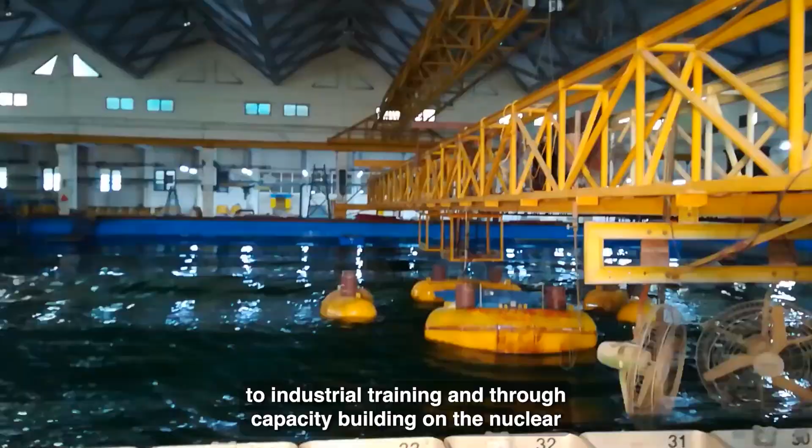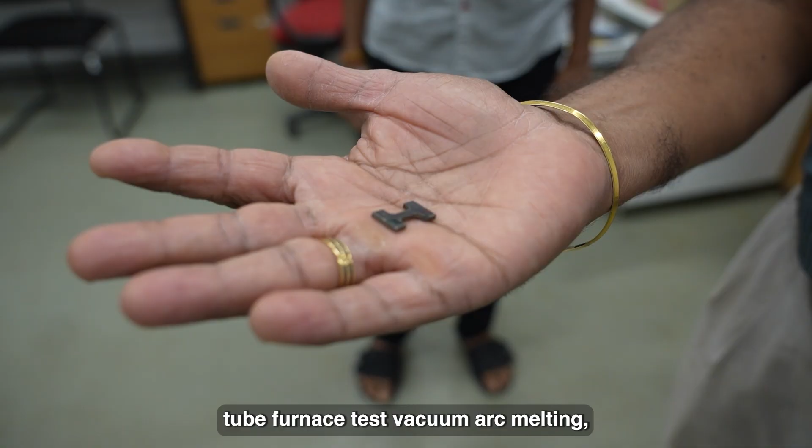This is part of a material science engineering laboratory which serves as a teaching aid for the maritime engineering program. When talking about materials innovation in the maritime industry, concrete and steel have been conventional candidates of choice for engineers, but we also have titanium vessels and high-speed craft boats made of fiberglass. These advanced materials do not always come under conventional standard design codes of practice. We conduct box furnace tests, tube furnace tests, vacuum arc melting, induction melting, vacuum induction melting, and vacuum sealing, all present in this laboratory, which is just a small segment of the material science laboratory.

This is a typical furnace where the operating temperature for testing specimens can go very high. Generally at room temperature and ambient conditions, the mechanical properties will not alter much, but as you'll see in the course lectures, the strength of the material degrades when temperature rises beyond 600 degrees. So when designing for fire resistance, you must choose an alloying element such that the strength doesn't degrade beyond 600 degrees Celsius.

Welcome to the ambience of IIT Madras lecture theatre. This is one of the interesting classrooms where maritime engineering classes will be conducted. We have state-of-the-art projection facilities and good audio-visual recording systems.

Once the lecture is over, the system can generate PDF files of the lecture directly, and these can be emailed directly to your email ID. It's a state-of-the-art facility at IIT Madras where lectures are recorded for lifetime and shared with students immediately. This is the IIT Madras library.

The library has all collections of books referred to as standard textbooks and references for the course and program. It also has a lot of online editions of design codes of practice, reference materials, and e-collections of various video lectures of international courses and programs related to maritime engineering.

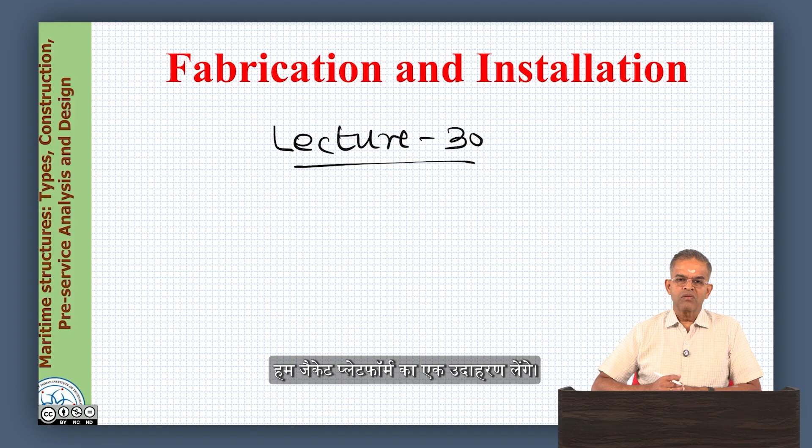We will take an example of a jacket platform, specifically a steel jacket platform. We already know jacket structures are bottom-founded structures used for oil and gas exploration, and they are a subset of maritime structures.

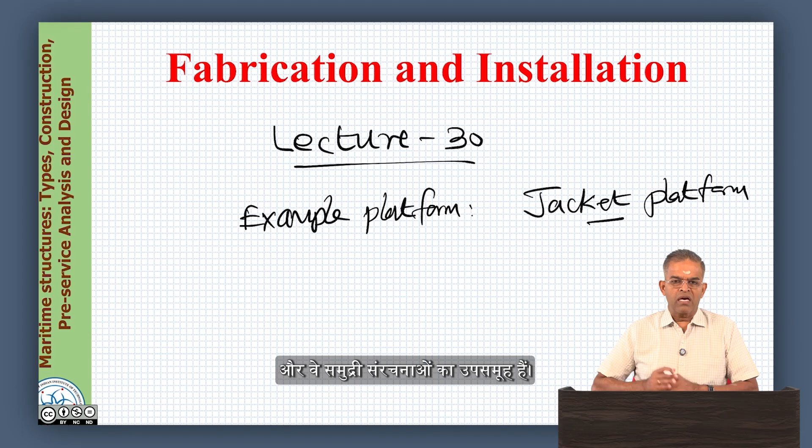Bottom supported platforms, as learned from previous lectures, are permanent, rigid type structures, fixed to the seabed using piles, or sometimes resting on their own colossal weight. An example would be gravity based structures which rest on their colossal weight. We also know that these kinds of structures become uneconomical as they move towards deep water installations, because the substructure cost increases phenomenally as you go into deep waters. However, bottom supported platforms are quite successful operating in shallow and moderate water depths, up to approximately 300 meters.

In previous lectures, you must have learnt how to classify water depth. It is not a simple number; it varies based on various hydrodynamic characteristics used to classify depth as shallow, intermediate, medium, deep, and ultra-deep waters. We have learned them, and I believe you will refresh that knowledge again.

In the previous lectures on structural action offered by these kinds of platforms, we learnt that bottom supported structures essentially resist the load by their strength. So, the geometry, the member sizing and thickness, the weight and the dimensions of the platform play a very important role in resisting the exciting force acting on the platform, because these platforms essentially resist the lateral loads caused by waves, wind, current and impact loads by their strength.

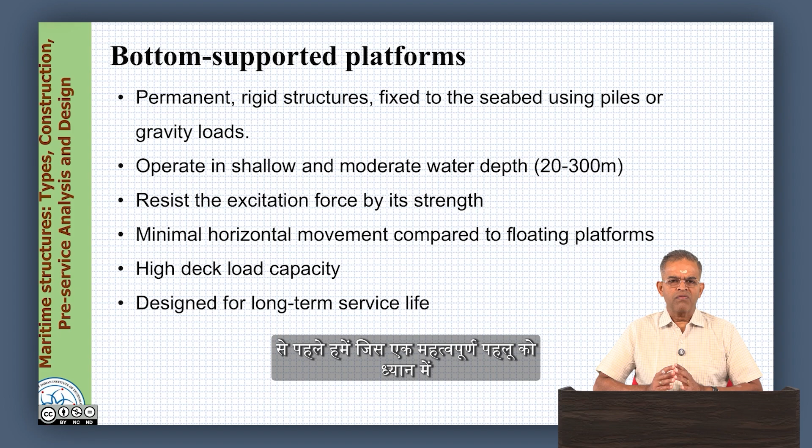One important aspect which we must consider before we think about fabrication and installation of bottom supported structures is that they are going to be heavy, they are very massive, and they are of larger size. They are required because they are designed to have large deck capacity and designed for long term service life. Approximately the service life of these platforms is said to be 25 to 30 years. Because of this duration of staying in marine waters, they are designed to be very strong, as well as founded in soil by pile foundations.

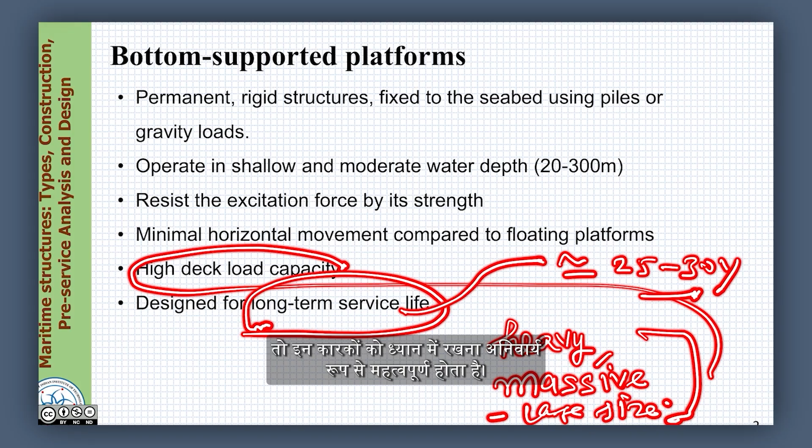So why are we talking about structural action, load and size? Because when we talk about installation and fabrication, these factors are essentially important to keep in mind. Let us quickly see some photographs of these platforms to recollect our memory from the previous lectures.

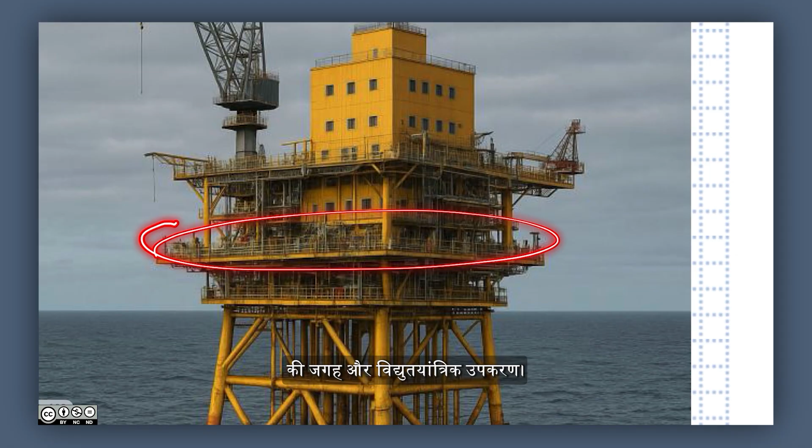Let us look at this, let us look at the top side again. The top side again has the living quarters, the crane and the drilling derrick, then the system for crane operation, then boat landing and electromechanical equipment. Look at the substructure - the substructure part is essentially steel, and it is a jacket platform. We call this assembly jackets, because they look like a template structure.

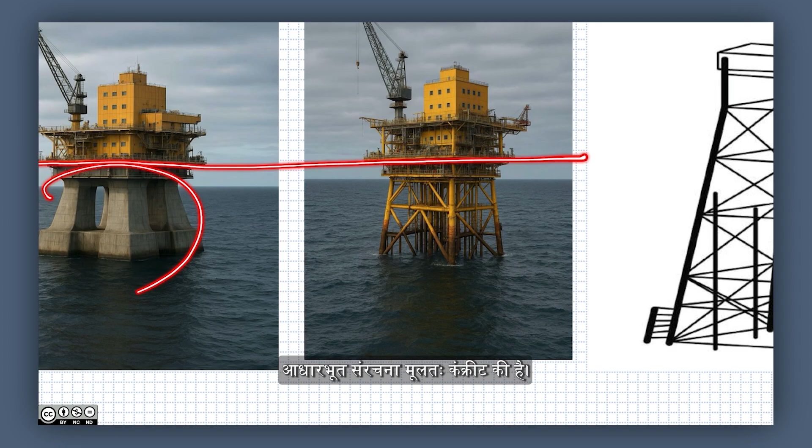Now I want to look at both these figures in parallel. Look at the substructure part of both figures - here the substructure is essentially concrete, here it is steel. This is a gravity based structure and it has got a very huge colossal weight, whereas this is not as massive as the GBS structure.

The most important feature which you will now notice and which is necessary to understand is that these structures are wave transparent. What do you mean by wave transparent? We allow the waves to pass through. When we allow the waves to pass through without any obstruction, the forces exerted by the waves on these members are minimal. But here you can say they form a massive obstruction, therefore they encounter waves in a larger amount.

Now one can also notice that the top structure remains more or less similar in both cases, and the top side structure has got different modules - the living quarter module, the upper deck module, the middle deck module, the landing module and the crane and jackets. These are all different modules which are pre-assembled and brought to site and then assembled here. So we do not bring the whole unit as one go - we do the substructure separately, the superstructure separately. Even in the superstructure, we can bring these pieces separately depending upon size and the convenience of handling as far as crane capacity is concerned.

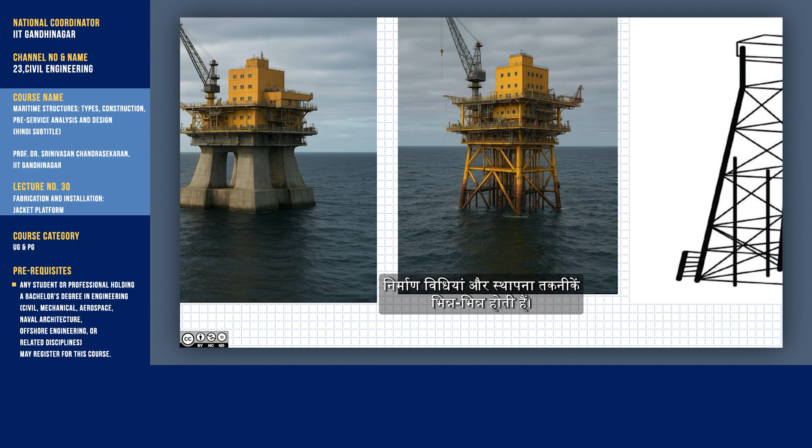As far as this is concerned, you need a big barge where they are placed and the barge is kept afloat to the site. So the fabrication methods and installation techniques vary with the different kinds of offshore platforms.

This has got to be understood because all of them do not have the same or similar substructure. Furthermore, when the substructure is of steel or concrete, when they are designed to be wave transparent or not, then the equipment and tools used for fabrication and installation are again going to be different. So we can say the installation methods vary with types of platforms.

That is a very interesting observation which you can also make from the figure. Let us clearly look at an overall view of a jacket structure. We know this is a heli deck on the upper side, and these are the main legs of the jacket. One can see the main legs are vertical, then inclined. There is a taper, about 1 in 15 - a gentle slope. So vertical, then tapered.

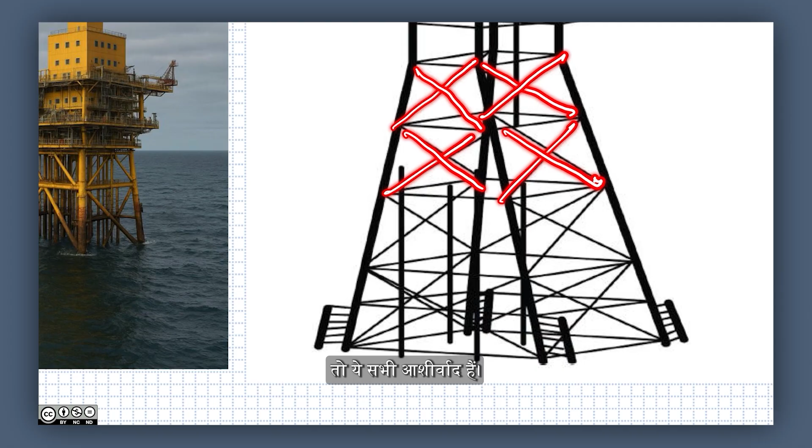So these are all the main column elements. You will also see the subsidiary secondary elements, and you will also notice these are the bracings - the shape being X, they are called X bracing. You can also have different types of bracing, which we will see in detail in coming lectures. So these are all the bracings, these are main legs, these are secondary elements.

So these elements and the fabrication has got to be done with higher quality control in the fabrication yard, because I cannot do the checking of welding, the non-destructive evaluation, after I install this in sea. For example, the water level is somewhere here, this is the water depth, and these are all going to get into the piles. So I cannot check any of these connections once they are installed and commissioned. So the entire quality control needs to be checked in the fabrication yard.

It means, very simply friends, this has got to be fabricated in the yard in modules and transported and commissioned.

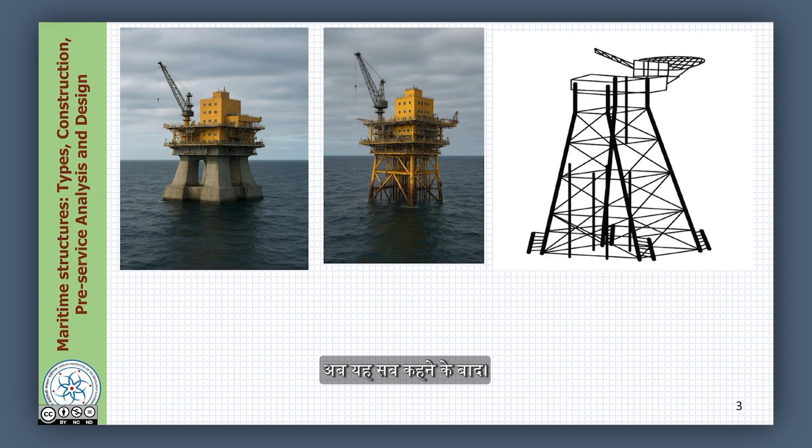Having said this, let us look at the steps involved in fabricating a jacket platform. Fabrication of a jacket platform has got some important points to remember. The foremost point, which is very important for a jacket, is material procurement. Jacket platforms are essentially fabricated using something called marine steel. We have already seen different classifications of steel in previous lectures of this course.

So you would have got an idea of what kind of steel is used for maritime construction at this moment. We are now specifically choosing marine steel as the material for the jacket, and we need to prepare the jacket using marine steel fabrication. So we do the assembly of components one by one, then we do the jacket legs and bracing assembly together. Once they are all arranged, we start welding them.

Once the welding is completed, then we install the pile sleeves and boat landings. We will talk about what is a pile sleeve a little bit later. Then for cathodic protection, or protecting these steel structures from extensive corrosion in marine environment, we also do something called anode fitting, which is useful for corrosion protection.

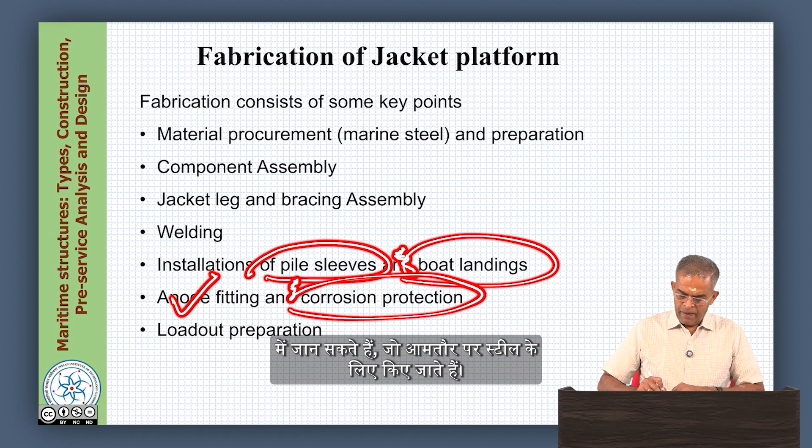Once this is all completed, we need to take it to the site, because all this is happening in the yard now, and I want to take it to the offshore site. So I do what is called load out preparation.

Okay, let us again revisit these points. Choose the material carefully. While choosing the material, you must do enough quality checks. You must visit the fabricating yard frequently. You must test the mechanical properties of the steel being used for fabrication intermittently, and you should be sure that whatever design parameters you have chosen for the design should be implemented in true spirit as far as the material properties are concerned. So a very good quality control on material procurement is necessary.

Furthermore, friends, fabrication is a continuous process. Similarly, installation is also continuous, you cannot stop this process once it starts, unless it is demanded by either a localized accident or because of some weather conditions. So therefore, friends, apart from procuring the material, you must also have enough quality control and indent for the materials.

So I could now say the important aspects for material could be: quantity of the material should be sufficiently available, and you have to check that in the beginning. You should also do the quality check in the yard for the material property. You should also provide enough indents for procurement of material in advance, so that the work is continuous and is not stopped.

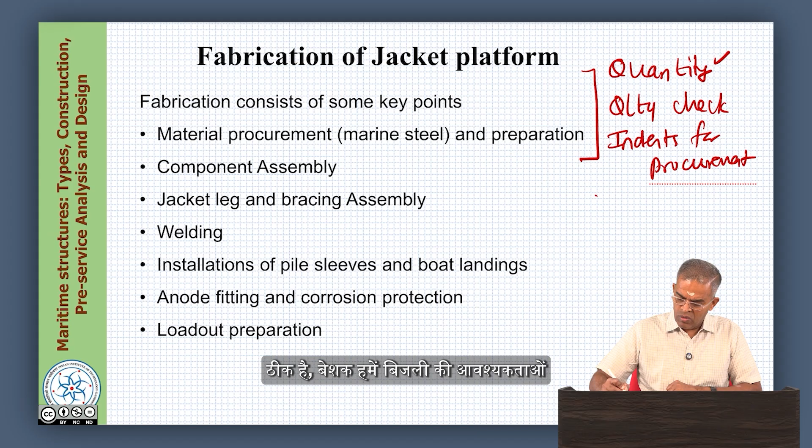Okay, of course we need to also look at the power requirements and safety requirements. I mean, without saying why they are not important, we all realize these are necessary, because our connections are essentially welded connections. We need high power to do this. Material procurement has got a lot of subsets to be controlled.

Once I have the material procured, first I will start doing the components. I will assemble the components. We have already seen what are the different components in a jacket structure or a template structure. We take the components, then we pick up the main legs of the jacket and the bracing assembly. We keep on joining them and so on. We do welding. We look into some pictures of how welding can be done and how welding can be checked.

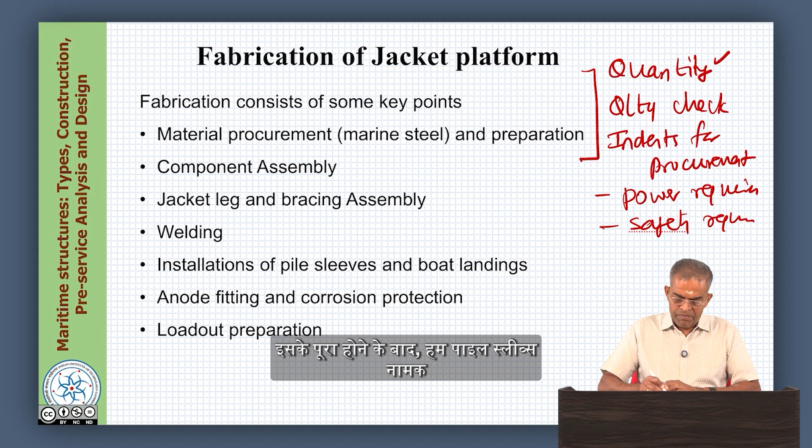So you do the arrangement for boat landing, then you also do some ancillary fittings like anode fittings, corrosion protection methods, and then once these are all done in the yard, keep them ready for something called load out. The word itself is very clear: load the assembly and take it out of the yard to the site. So this is called load out preparation.

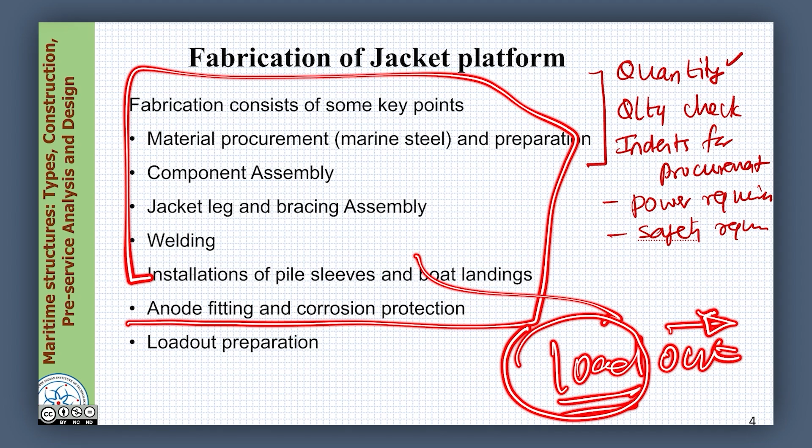Okay, having said this, let us slightly talk more about the material procurement and preparation. The common cross-sectional shapes used for jacket platforms are tubular steel tubes. We also use plates for the deck, and there are some special components like pile sleeves, conductor guides, and ancillary corrosion protection materials which are used.

Let us now see what is a conductor sleeve. Then let us talk about this. Let us talk about what is a conductor guide. Friends, conductor guides are specialized components used in offshore drilling.

Why are they required? They are required to accurately position and install the well conductors. Well conductors are a component of the offshore drilling assembly. Furthermore, these guides are very necessary when you use large diameter pipes.

When you need to drive these pipes into the seabed to improve the well stability, we use conductor guides. Okay, so what is the installation process of conductor guide?

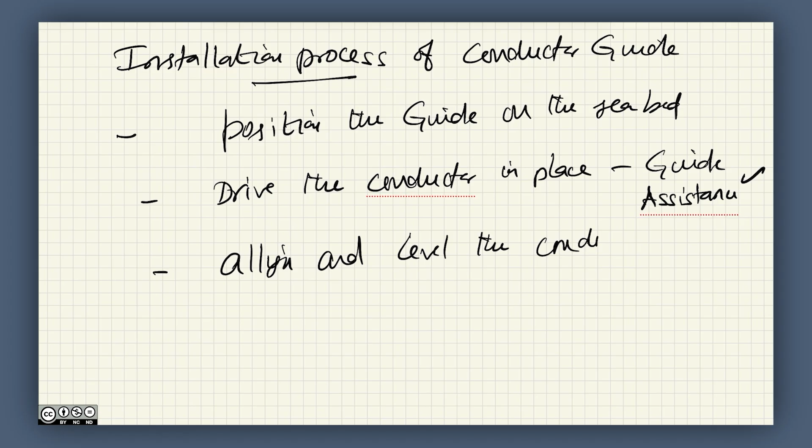First, position the guide in the seabed. Second, drive the conductor in place. Third, use the guide assistance. Then align and level the conductor. Then secure it properly, that is, fix it properly, and verify or check its integrity.

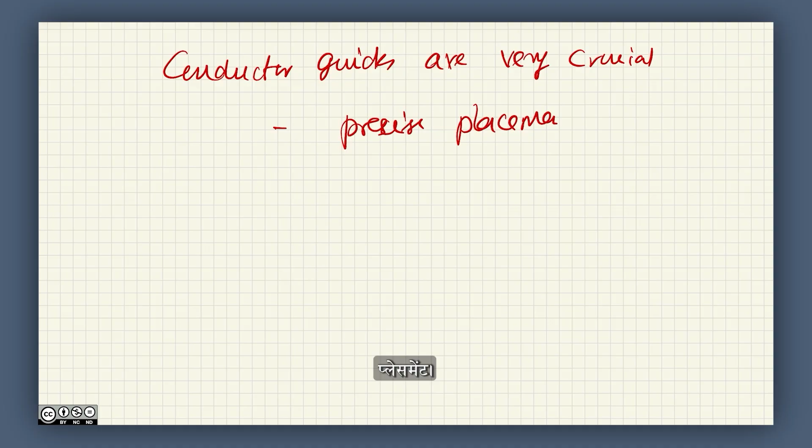Now, friends, conductor guides are very crucial to ensure precise placement of the conductor. And why do you need this? It is important to ensure wellbore stability, which is necessary for offshore drilling operations.

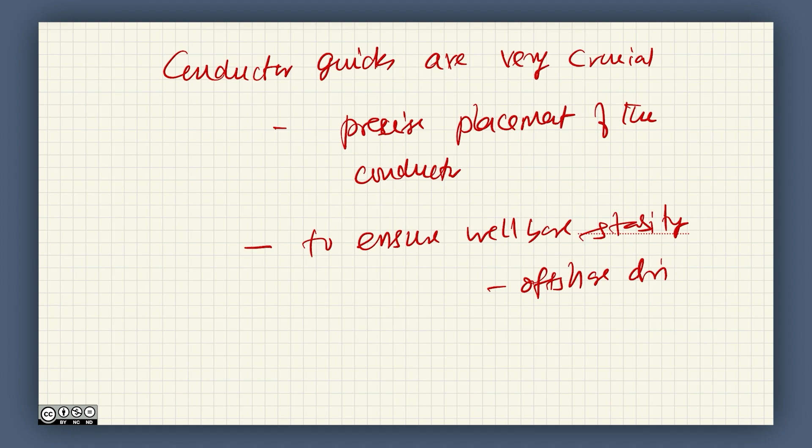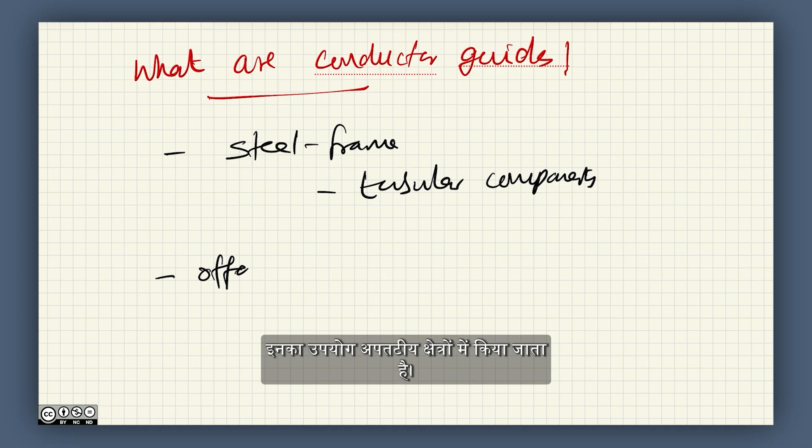Then the question comes, what are conductor guides? Conductor guides are steel frames. They can also be tubular components. They are used in offshore oil and gas production systems to position the drilling rig, to align the rig, and to provide lateral support to the well conductors.

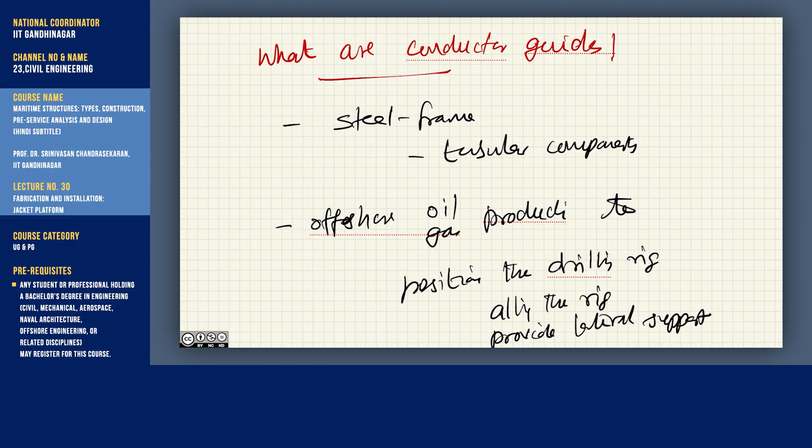So whenever you have large pipes to be driven in the seabed, you need conductor guides. That is a general story we can write: for drilling large pipes into the seabed, we require conductor guides.

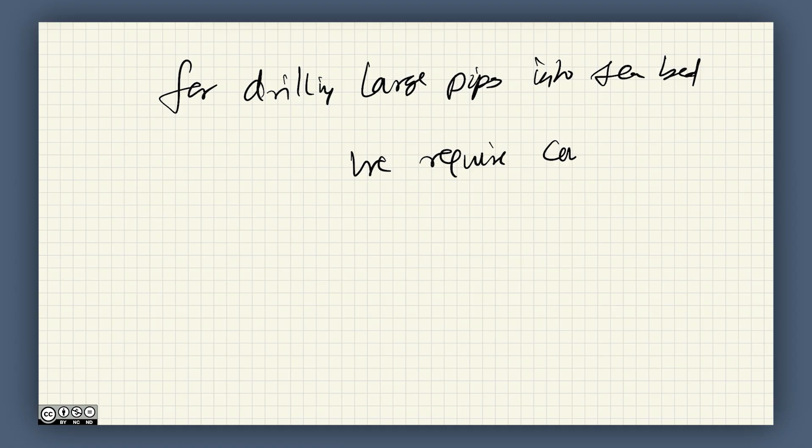Now, conductor guides, where are they installed? They are installed at various elevations in the jacket. They also help to withstand lateral forces from waves and wind.

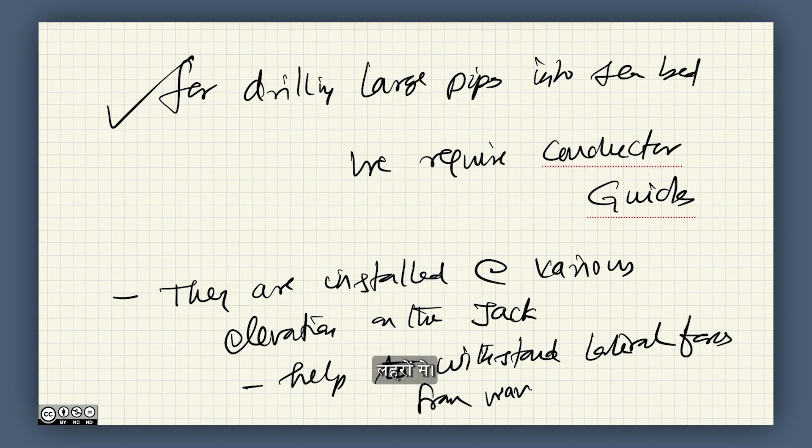Let us see what are the functions of this. What is the primary function of a conductor guide? Precise positioning of the conductor. And why is it required? If you want to ensure wellbore stability during drilling, you require this.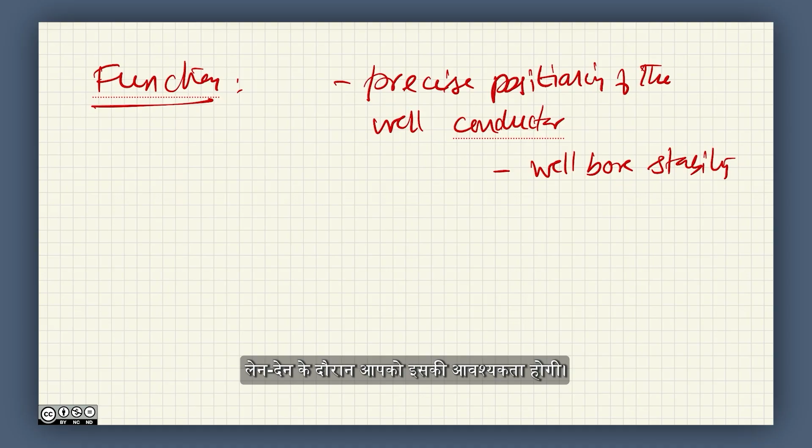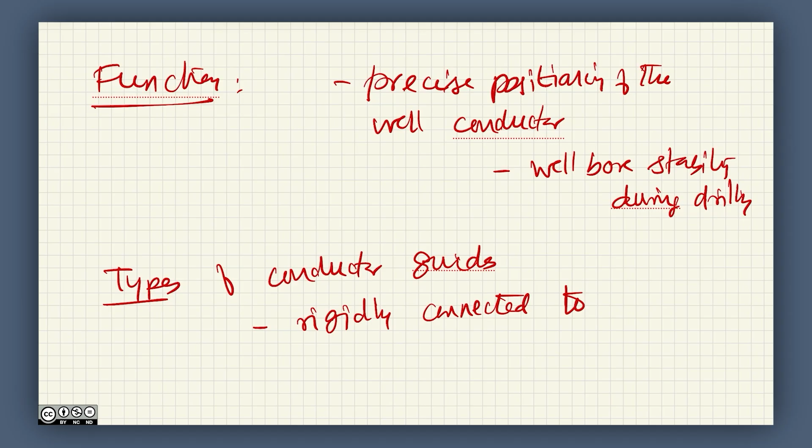There are different types of conductor guides. One, they can be rigidly connected to the jacket framework. Another way, they can also be adjustable with legs using bolts.

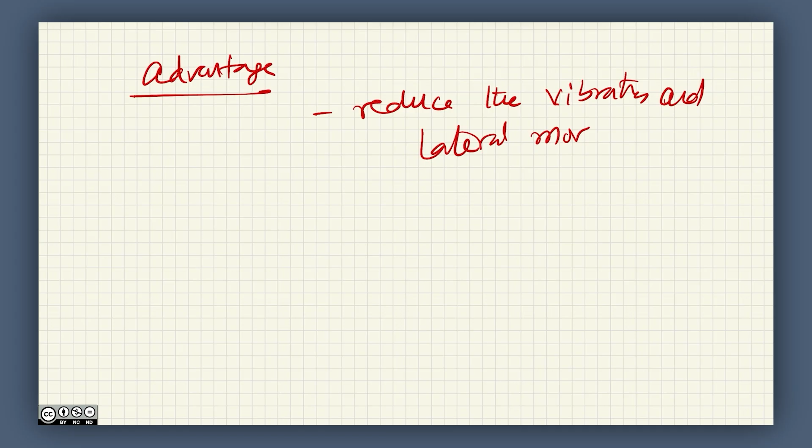What advantage do you gain by using a conductor guide? It helps to reduce the vibration and lateral movement of the leg. And it also helps reduce the fatigue damage, I mean it improves fatigue life.

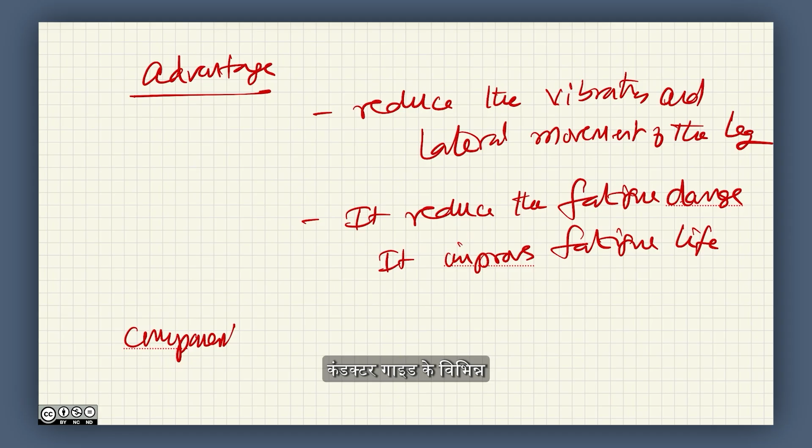What are the various components of your conductor guide? Various components are the guide frame, sometimes polyurethane, centralizers, and guide can.

So conductor guides are useful for precisely achieving the drivability of large diameter piles into the seabed, and they are helpful in improving the wellbore stability and integrity of the subsea well systems.

So we said that conductor guides need to be assembled, and then you also start procuring material for ancillary and corrosion protection materials. Once you procure them, verify the grades. Steel is graded as grade 1, 2 and 3 as we saw in API RP 2A in the previous lectures. So verify the material grade, conduct tests on them at the site, in the fabrication yard, and quality checks need to be done according to API RP 2A, ASTM and ISO standards.

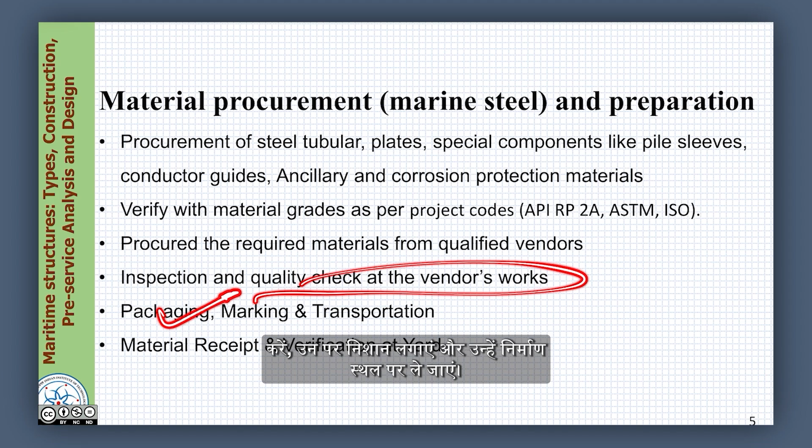Once you are verified with this, procure them in enough quantity from qualified vendors. Inspect and do quality check at the vendor's works before it is transported to the fabrication yard. Then after the quality check is completed, pack them, mark them and transport them to the fabrication yard. Now maintain a proper receipt and verification at the yard. So these are all the steps involved in material procurement before fabrication, what we prepare for fabrication in the fabrication yard.

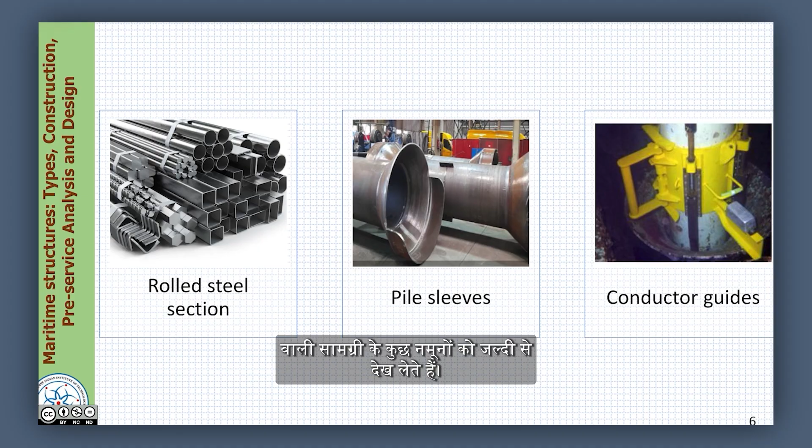Once this is done, let us quickly see some samples of material procured for one such jacket platform construction. You can see different kinds of rolled steel sections being used: square with uniform thickness with sleeves, circular with mounted caps at the tip, where the tip is slightly larger than the diameter, what we call mounted caps. You can also have studs, which are solid steel pieces of hexagon shape, and rods which are used to connect the sleeves together.

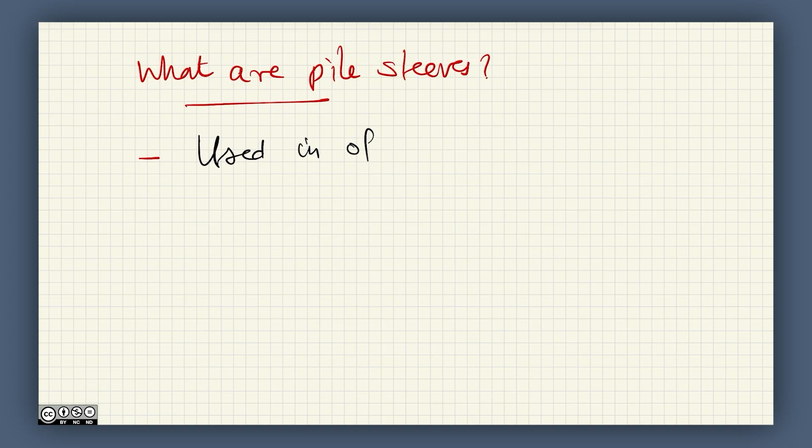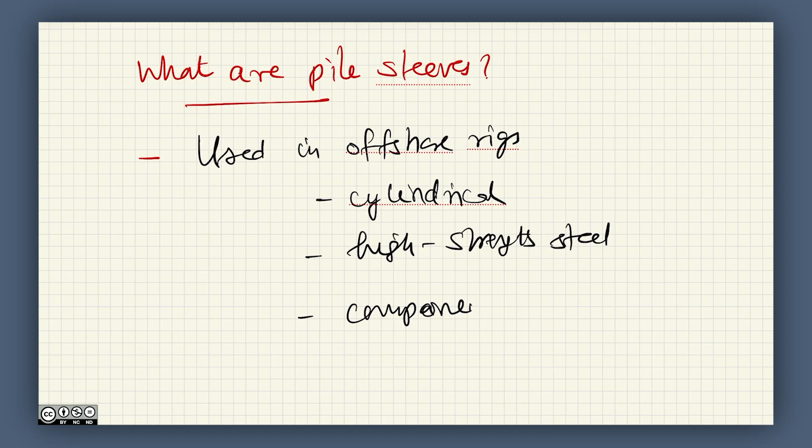Then the question comes, what are pile sleeves? The pile sleeves are used generally in offshore rigs. They are cylindrical, made of high strength steel. They are components attached to the bracket, to the main legs of the jacket. They are helpful in guiding, supporting and securing the steel piles while they are driven into the seabed. The pile sleeves typically look like this - these are pile sleeves, and they help you guide the piles while they are driven into the seabed.

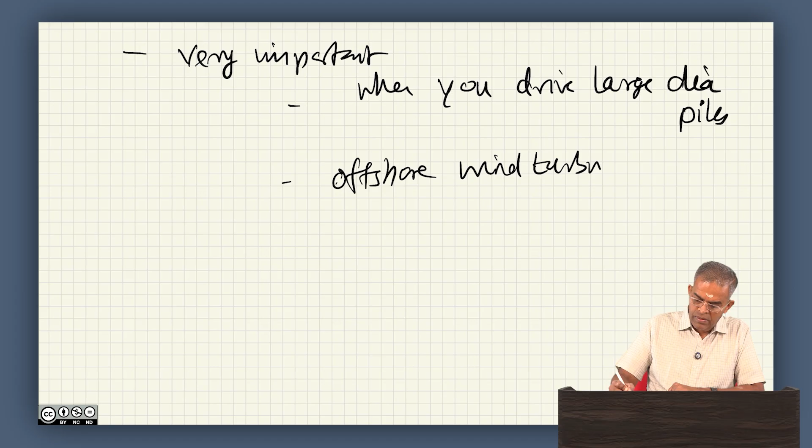They are very important. Essentially, when you drive large diameter piles, they are very helpful in the case of offshore wind turbine installation. They are helpful in withstanding lateral loads caused by waves and wind.

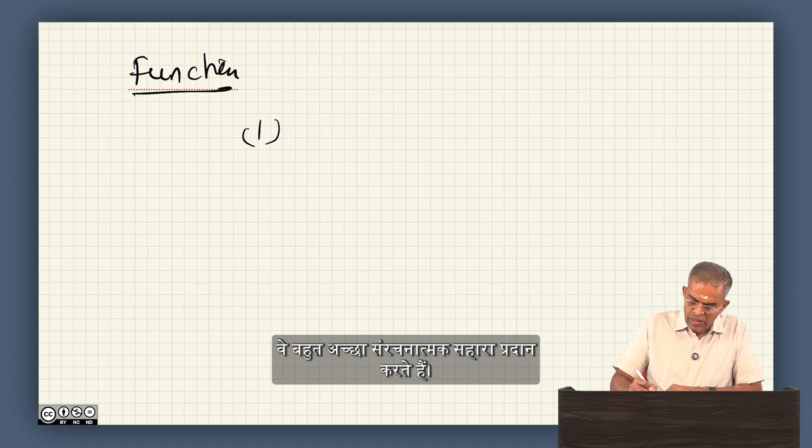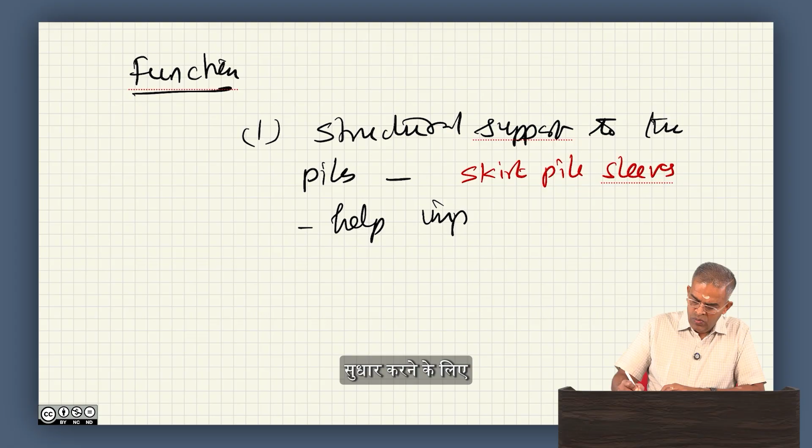Let us see a few important functions of pile sleeves. They offer very good structural support to the piles. They are sometimes referred to as skirt pile sleeves also. They help to improve stability of piles when driven into the seabed.

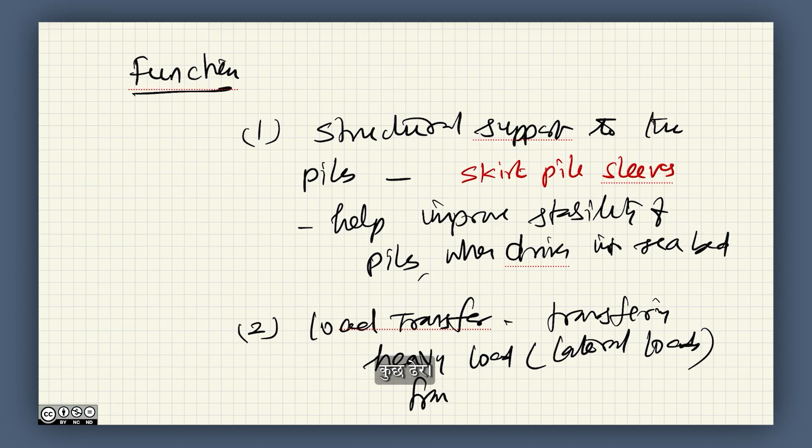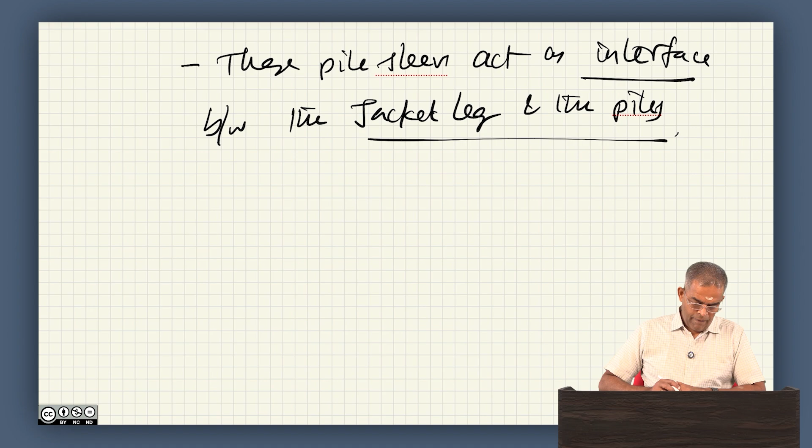The second function is a very good load transfer path. They help in transferring heavy loads, essentially lateral loads, from the piles to the soil. Furthermore, these pile sleeves act as an interface between the jacket legs and the pile, so they are very helpful during grouting.

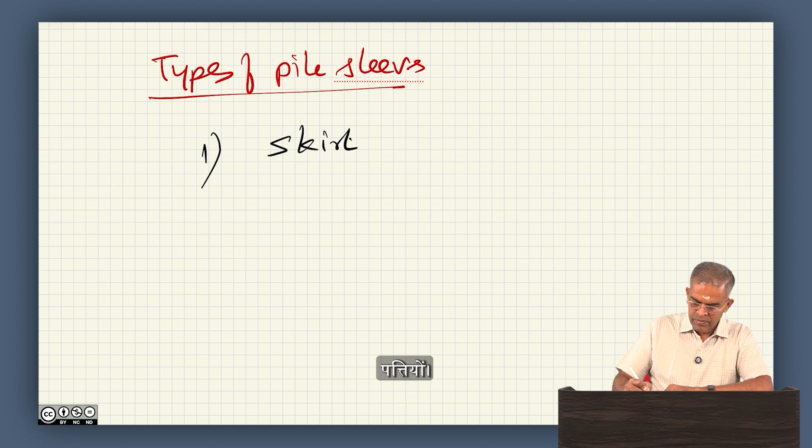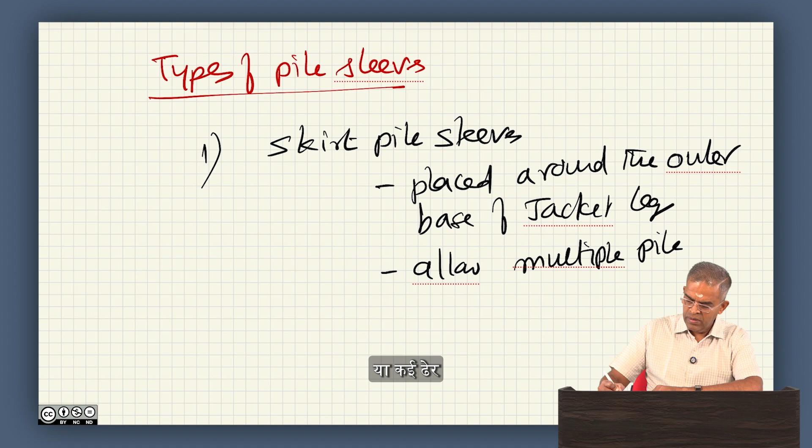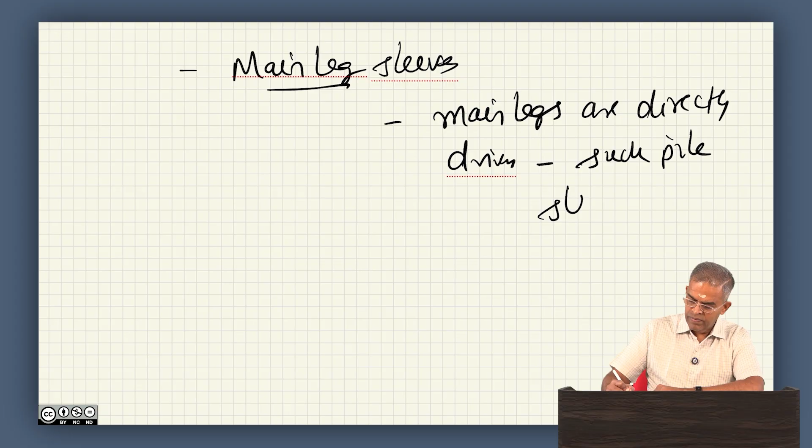There are different types of pile sleeves. One, skirt pile sleeves - these are placed around the outer base of the jacket legs, and therefore they allow multiple legs or multiple piles to be driven in a cluster. The other type is the main leg sleeves - in many cases, main legs are directly driven, and in those cases such pile sleeve types are useful. How do you install a pile sleeve?

So there are 3 steps involved. Step number 1, stabbing and driving. Step number 2, grouting. Step number 3, underwater operations.

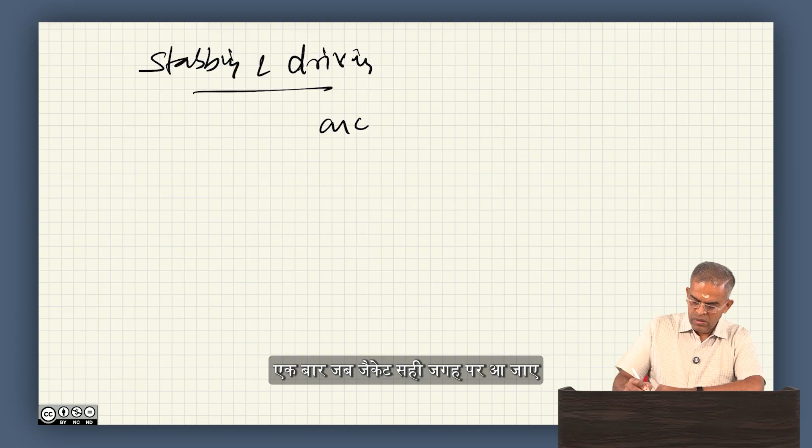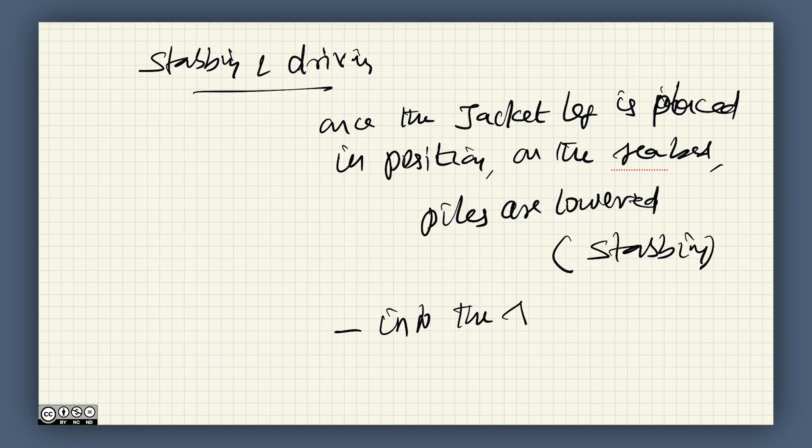Let us see one by one quickly. In stabbing and driving, once the jacket is in position, or jacket leg is placed in position on the seabed, then piles are lowered. This process is called stabbing. They are lowered into the sleeves, then driven to required depth using hammers, hydraulic hammers. That is called stabbing and driving.

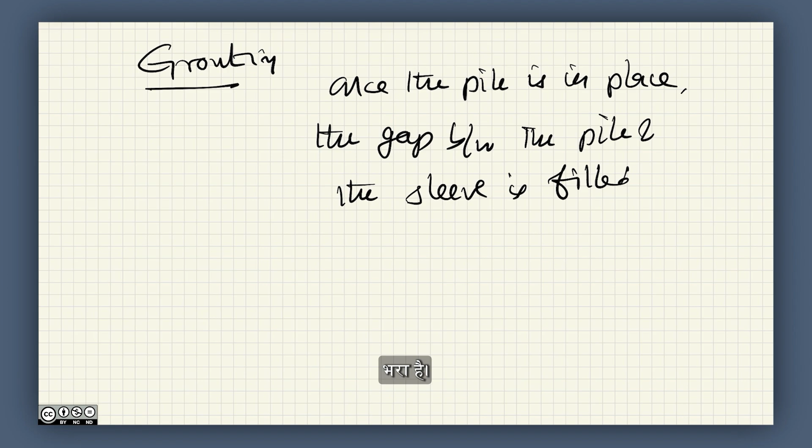The next step is grouting. Once the pile is in place, the gap between the pile and the sleeve is filled. This is an annular space which is grouted, and this will help to create a permanent connection.

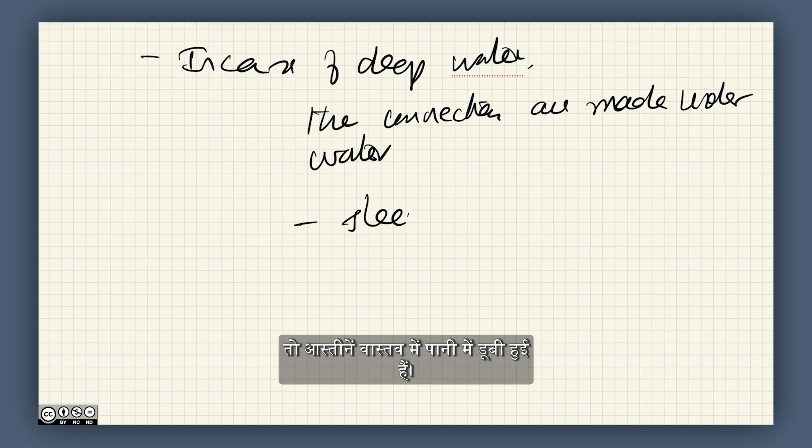The third step, in case of deep waters, the connections are made underwater. So the sleeves actually are submerged at about 20 to 30 meters in water.

Let us see what are the components of a pile sleeve, key components. There are key components like shear key, packers, and guide cones.

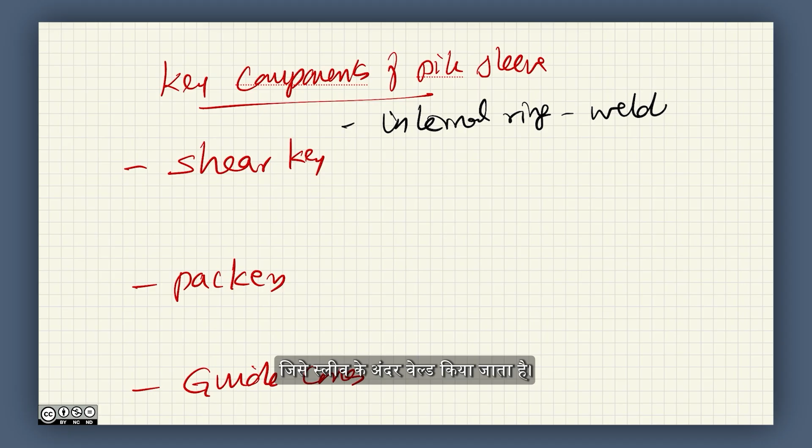Let us see what is the shear key. Shear key is an internal ring which is welded inside the sleeve, and of course outside the pile. What is the purpose? It helps increase the strength of the grouted connection. That is why it is called shear key.

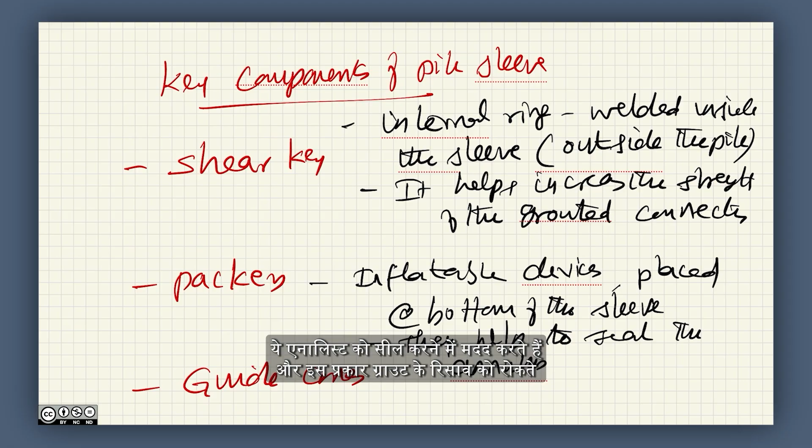Packers are inflatable devices which are placed at the bottom of the sleeve. They help to seal the annulus. Annulus is the gap between the pile and the sleeve. They help you to seal the annulus, and therefore it prevents grout from leaking.

Guide cones are added to the top of the sleeve, and they help in assisting the pile driving.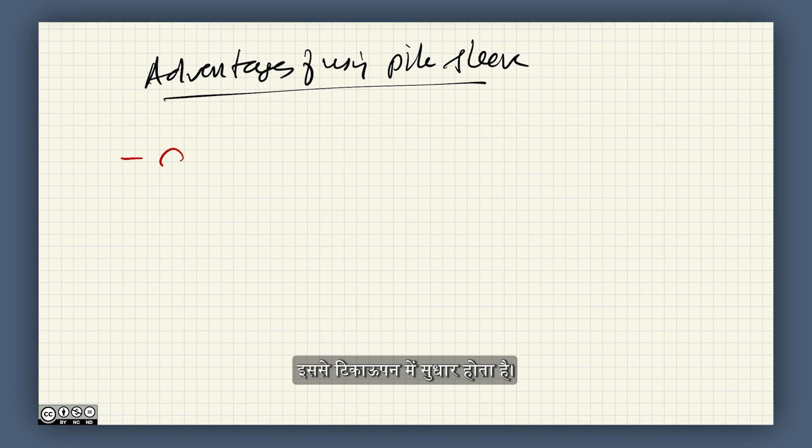Now pile sleeves have got a lot of merits. What are the advantages of using a pile sleeve? It improves the durability. So in case of long term deployment in rough sea, which will last about 50 to 100 years, they help resist loads and reduce corrosion.

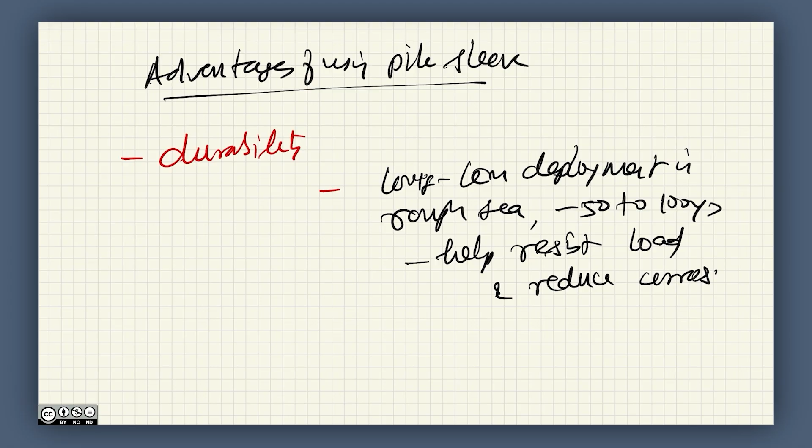The second advantage is the installation efficiency increases, because they allow flexible, at the same time strong and precise installation.

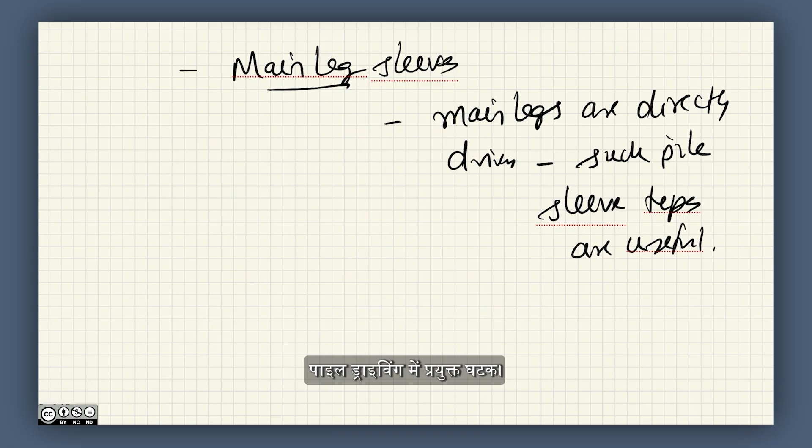Friends, pile sleeves are a very interestingly important component used in pile driving, as we saw, and a typical pile sleeve looks like this. You can see the pile sleeves are attached to all the pipes.

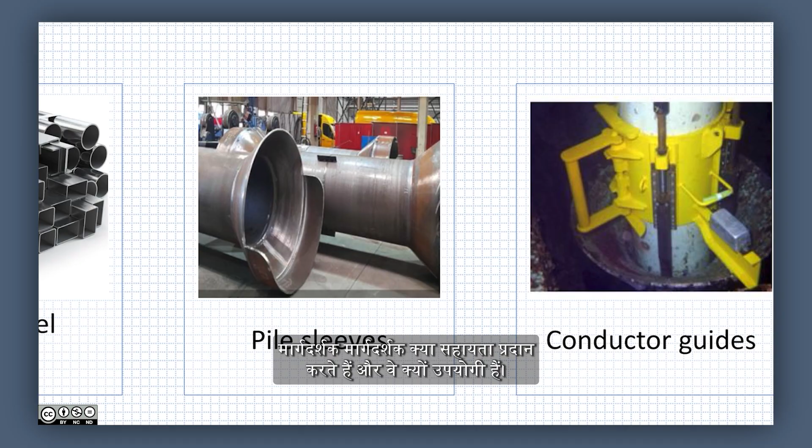Furthermore, we also have some figures and photos of conductor guides, which we already explained - what these conductor guides do and why they are useful in guiding them. So the essential function is to help precise positioning of conductors in the wellbore to improve the wellbore stability. Having said this, let us move forward to understand the further installation steps involved.

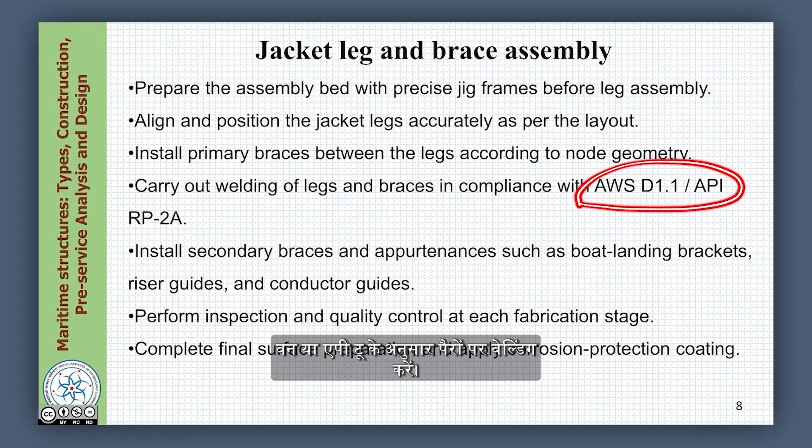So then the question comes, the jacket leg and brace assembly is again an important component in the assembly. Prepare the assembly bed with precise jig frames. Align the position and the jacket legs accurately as per the layout. Install the primary braces between the legs according to the node geometry, then carry out welding of the legs as per AWS D1.1 or API RP 2A.

Once the main legs are welded with the braces, then install the secondary braces and other appurtenances such as boat landing, riser guides and conductor guides. Once the whole assembly is completed, perform inspection and quality control at each fabrication stage. Complete the final surface preparation and then apply corrosion protection coating. This is very important.

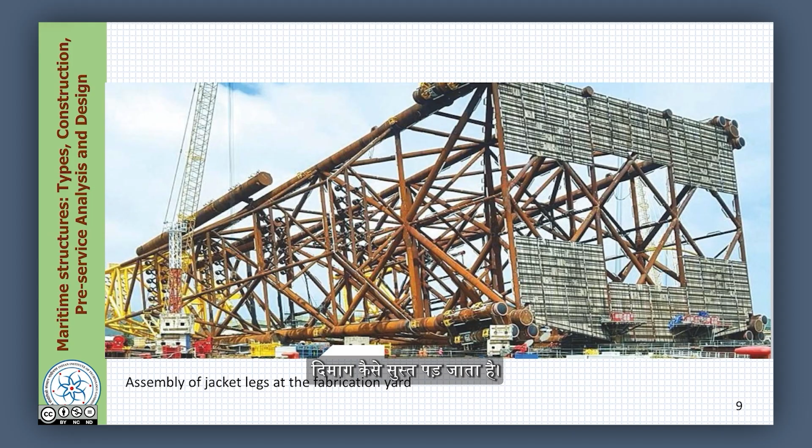This typical figure shows how the mud mats, how the main legs, how the bracings are assembled in the fabrication yard, and one can also see how they are checked, lifted, welded and checked using cranes in the fabrication.

Then comes the question of welding. How do you perform welding? Fit up and align the jacket legs and bracings using jigs. Jigs are temporary supports used to hold the legs, because during welding they get warped and twisted. So you have to hold them tightly. Jigs are those structural elements which are used in the fabrication yard to hold the legs while welding.

One has to perform pre-weld inspection of joint preparation, then the electrode condition, and one has to also do the preheating requirements before welding. We are talking about welding of thick members.

The thickness of the member varies from 50 to 75 millimeters. Thick welding needs preheating, so one should check the preheating requirements before welding is done.

The legs and bracings are welded as per AWS D1.1 or API RP 2A standards. One needs to follow a controlled welding sequence to minimize distortion. You cannot simply keep on welding the entire leg.

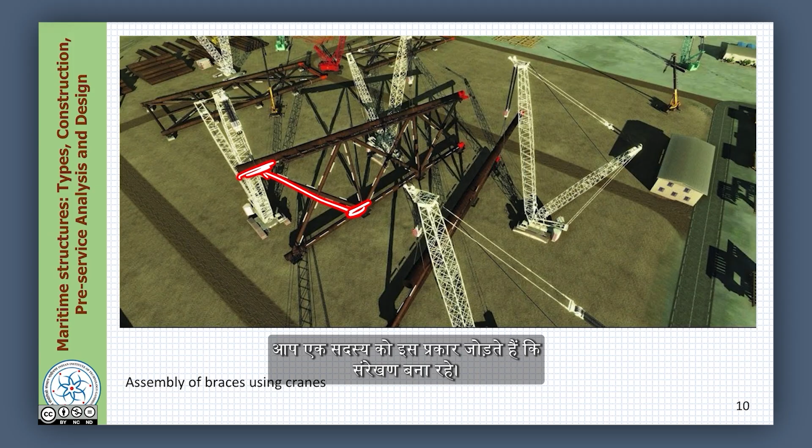For example, if this is the main leg of one assembly, if you are welding here, one has got to hold both members with jigs in position, then do welding here and here, then here and here. You cannot do these two weldings first and then leave it separately. One has to be careful to connect one member so that alignment is maintained, then connect the next member, and so on - following the sequence.

Once the welding is completed, one needs to do post-welding cleaning and then inspect the welding connections using ultrasonic methods, then repair if necessary, then clear the job for final acceptance of load out operation and preparation.

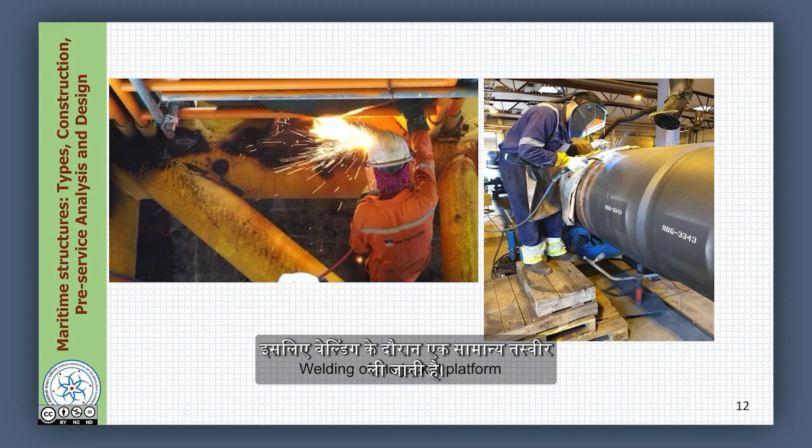A typical photograph during welding is shown. One can see how welding is performed at the pipe connections using seam welding with high-end electrodes, the jigs placed in position to hold the pipe when welding, and how the main leg is connected to the bracing.

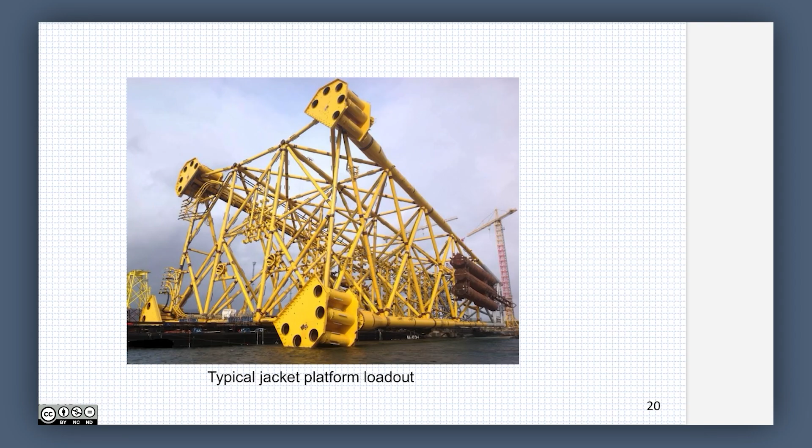We already discussed the pile sleeve in detail. Fit up the pile sleeve in position, do tack welding first, then the bracing, then full welding of the sleeves as per approved standards. One has to verify dimensional accuracy of the sleeve IDs, spacing and alignment, conduct NDT inspection, do surface preparation and coat them with anti-corrosive paint before load out. The typical pile sleeve welding is shown here.

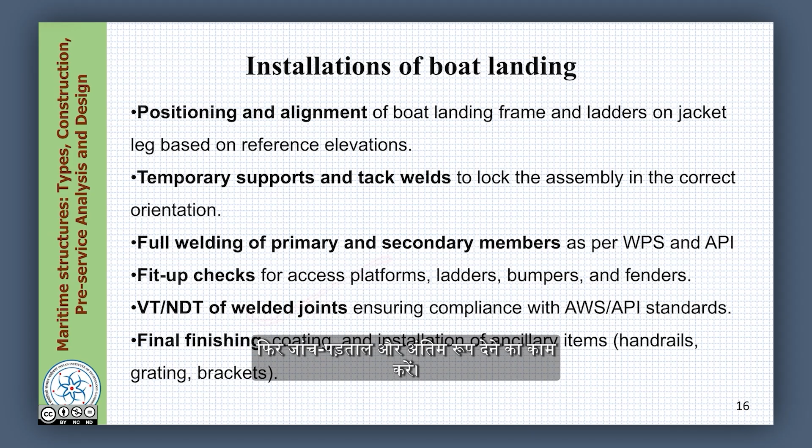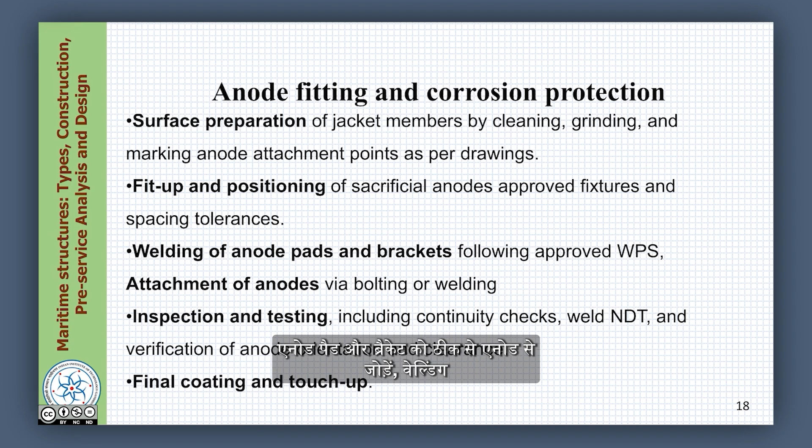Then there's anode fitting and corrosion protection measures. Prepare the surface of the jacket properly by grinding, cleaning and surface preparation. Fit up the sacrificial anodes in correct position as per design requirements. Weld the anode pads and brackets properly, attach the anodes, inspect the welding, then apply final coating and touch-up, and prepare for load out operations.

Now the load out preparation is almost reached. Verify the load out engineering documents including weight control, center of gravity, skidway design, etc. Prepare the skidways and support structures. Install temporary works such as lifting lugs, padeyes, etc. Conduct equipment checks - winches, cranes, jack push-up systems, load cells, communication systems. Please inspect all of them.

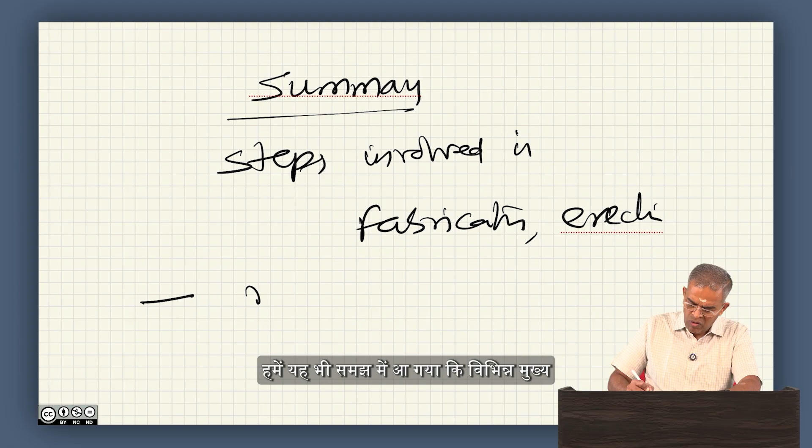We stop here in this lecture. This lecture gave us a summary of the various steps involved in fabrication and erection. We have also understood the various main components and ancillary components, the importance of welding, checking the welding using NDT, and finally keeping it ready for load out preparation.

Hope this sequence helps you understand how intelligently a load out stage is reached from the fabrication yard, where a maritime structure like a jacket is made ready for load out operation. Hope you will follow this and read more literature parallel to this to understand further.